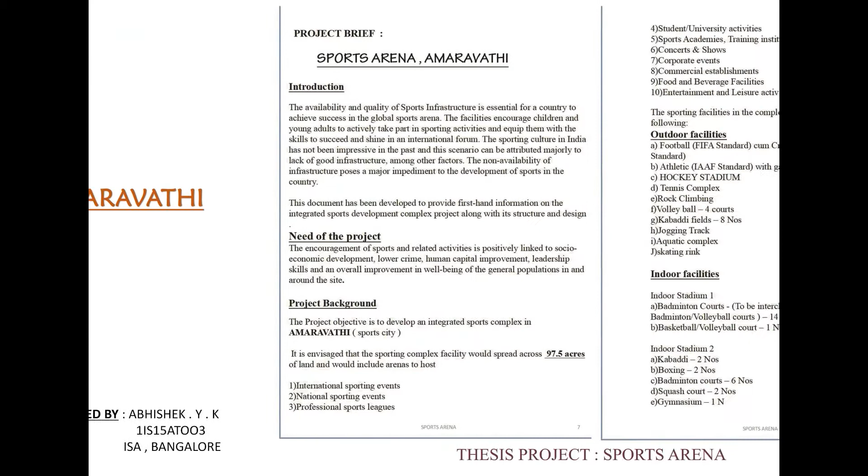Hello, this is Abhishek from Impact School of Architecture, presenting my thesis project on a sports arena proposed to be built in Amaravati, Andhra Pradesh. The availability and quality of sports infrastructure is essential for a country to achieve success in the global sports arena. Lack of proper infrastructure in sports, especially in South India, is a key reason to choose this project.

The need for this project stems from the fact that encouragement of sports is directly and positively linked to socio-economic growth, as well as overall improvement in well-being.

The objective of the project is to develop an integrated sports complex in Amaravati spanning around 98 acres. The sports arena is expected to host national and international level sports events with all outdoor and indoor facilities. In this sports arena, I will be concentrating on the detailed design of an international level cricket stadium and hockey stadium.

Coming to the site analysis, according to the detailed master plan of Amaravati, the city is divided into 9 different cities: Sports City, Government City, Finance City, Tourism City, Health City, Knowledge City, Electronic City, Justice City, and Media City. Our project is proposed on the land designated for Sports City, 98 acres, next to the Government City.

The project site falls under the sports zone and mixed use zone. The allowable FAR is 2.55, and the project site is surrounded by villages known as Borupalem, Abbarajupalem, and Rayapudi.

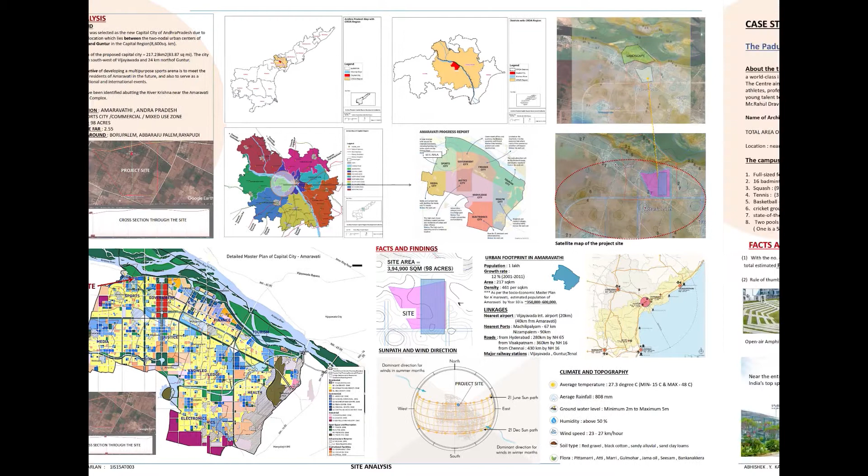This slide is about the case study on Padukone Dravid Sports Center, designed by Space Matrix Architects, located in Yelahanka, Bangalore, spread over 15 lush acres. This case study was very helpful in knowing how to calculate footfall and in understanding active and passive spaces.

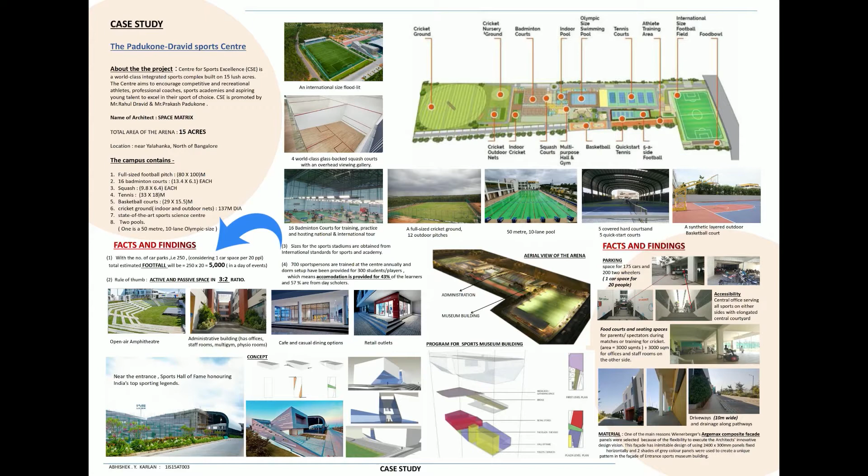The complex basically has 5 different zones: the outer fields, indoor courts, museum building, administration, and shops and canteens. There have been a lot of facts and findings about accessibility, vehicular and pedestrian movement, and parking based on the footfall, which is mentioned in this slide.

Literature study was done on the International Sports Complex at Saily. This sports complex is spread over 27 acres with a spectator capacity of 42,000. This activity mapping shows various sports events being practiced in different parts of the campus. You can see here how pedestrian, player, and vehicular movements have been segregated.

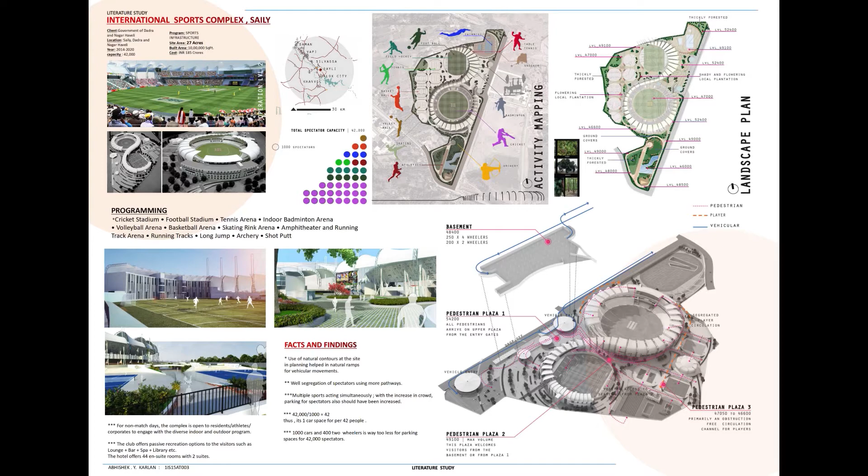The landscape plan gives us an idea of active and passive spaces in the ratio of 3:2 according to the rule of thumb. From the facts and findings, I learned that they have well managed the natural contours in planning, which helped in creating natural ramps for vehicular movement.

This slide is all about the research and area programming. Footfall is one of the major aspects to be considered in order to design an integrated sports arena, and finding the footfall was really a tough task for me in this project. Finally, the footfall calculation was done based on assessment of sports facilities in India, regional demand for sports facilities, and current sports infrastructure in the surrounding area.

The detailed explanation for each aspect has been provided here.

So as I got the footfall, it was easy for me to calculate the parking spaces and finally came to the conclusion for the total area required for the project. So for 99,500 footfall, the estimated area required for the project is 98 acres, including 4,975 car spaces.

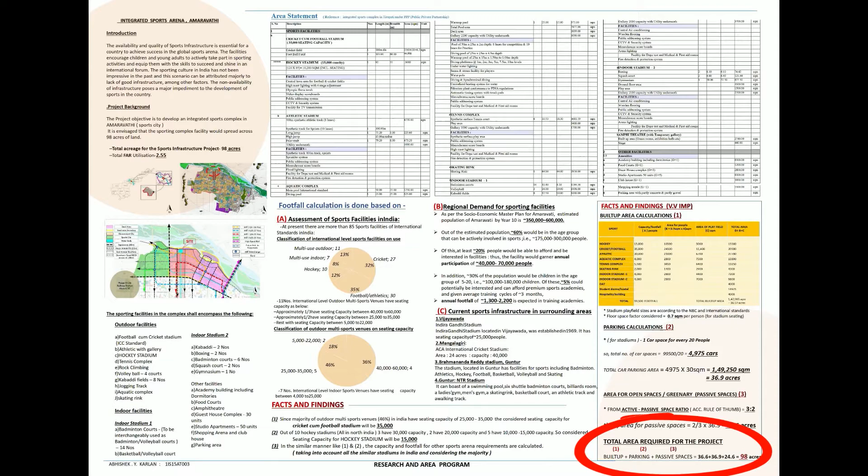Here I start with the master planning of the sports arena. Amaravati is bound by natural features, mainly Krishna River and its rivulets. The concept for master planning is inspired from the formation of rivulets, and this is how the design process for master planning started, keeping this concept in mind.

Initially, there was an idea of having water bodies throughout the sports arena in the form of rivulets. But later, the water bodies were reduced in order to minimize the maintenance and keep it grounded in reality.

The zoning for the master plan is worked out on the basis of indoor stadiums, outdoor stadiums, practice fields and practice courts, parking lots and landscape.

We have two main entrances, one in the north and the other in the northeast. There is a separate entry, back entry and exits provided for the cricket stadium, as it has the highest ingress and egress, and the footfall needs to be segregated.

As we enter from the main entrances, we are dropped off in front of the entrance building that houses the reception and displays meant to encourage sports and showcase achievements. It is more like a viewing gallery towards hockey, cricket and other indoor stadiums.

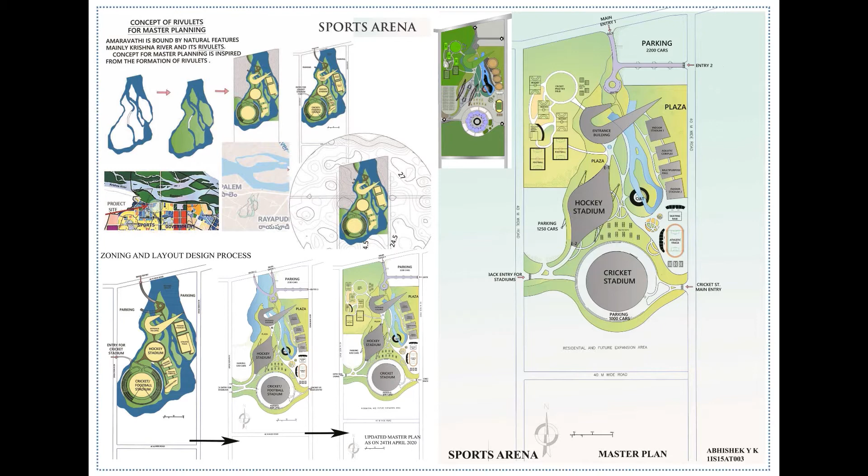There are three main parking points: one in the northeast with 2,200 car spaces, a second one in the west next to the hockey stadium with 1,250 car spaces, and a third one around the cricket stadium.

Coming to the international level cricket stadium, this stadium was inspired from a flower called blue chrysanthemum. This flower symbolizes nobility and stands for getting together. The pattern of petals in the chrysanthemum, bowing inwards, and their arrangement is the key inspiring element for the design.

Each petal-like external shield unit acts as a facade as well as a cover for the seating, making it a magnificent circular structure. This cricket stadium design was also submitted for a national level competition, INSDAG - Institute for Steel Development and Growth - and was selected as one of the finalists in Kolkata.

Let me first show you the walkthrough of the cricket stadium so that it would be easy to understand the plans.

You have 8 entry gates and parking lots on either side. You enter the stadium at the +1 level and reach seating through the vomitories.

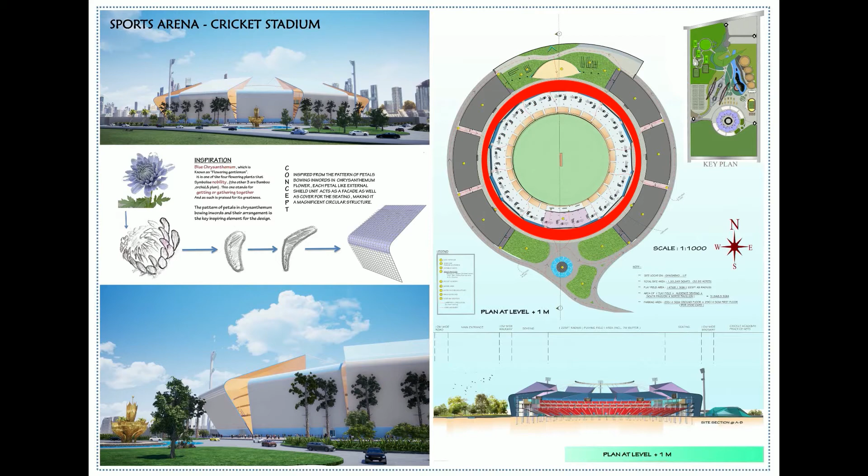In the south pavilion, you have the reception, player facilities, player rooms, cafe, bar, and first aid area. So you have the central 225 feet radius playing field, then comes the seating, then the spectator walkways, and then the parking and exit gates.

The south pavilion also has a viewing gallery and special VIP seating with the selection committee.

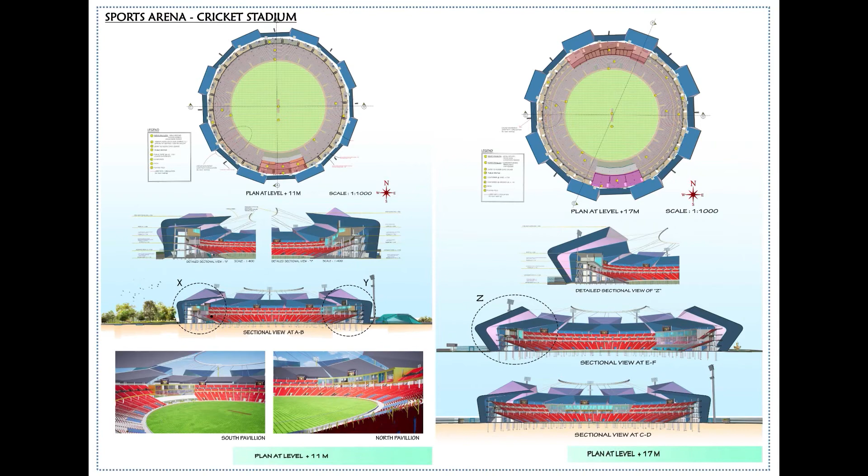Now I come to the most interesting part of this design, the USP of this design: the use of Vibrowind technology on facades to make the stadium energy efficient. Vibrowind technology is a turbine-free technology to harvest wind into electricity.

This project proposes to put a panel of about 25 oscillators per square meter, estimated to produce 54 watts per meter square in an hour.

The main advantage of this technology compared to solar panels is that it works without sun and even at 2 meters per second, which is what makes it unique.

A stadium on average consumes 20 lakh to 30 lakh units of electricity per year. For the stadium designed, installing this technique on a facade area of 25,000 square meters would produce 15 lakh to 30 lakh units per year.

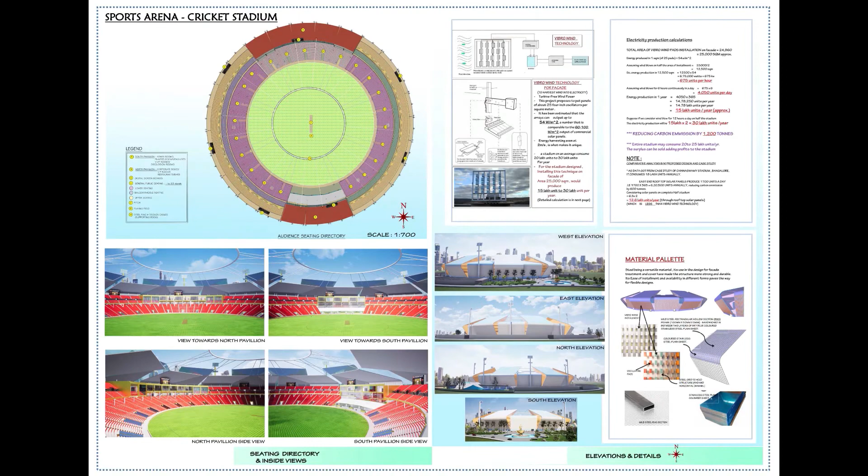If we observe each external shield unit, we see that a mild RHS frame, that is the rectangular hollow section frame, is sandwiched between two layers of steel plane sheet.

This is the end of the cricket stadium, and now we move on to the design of the semi-open hockey stadium. The initial idea arose from the local Amaravathi stupa with its huge dome. With thoughts of having a central hockey play field and seating, I felt it necessary to add some landscape within the stadium itself, and this is how it came out.

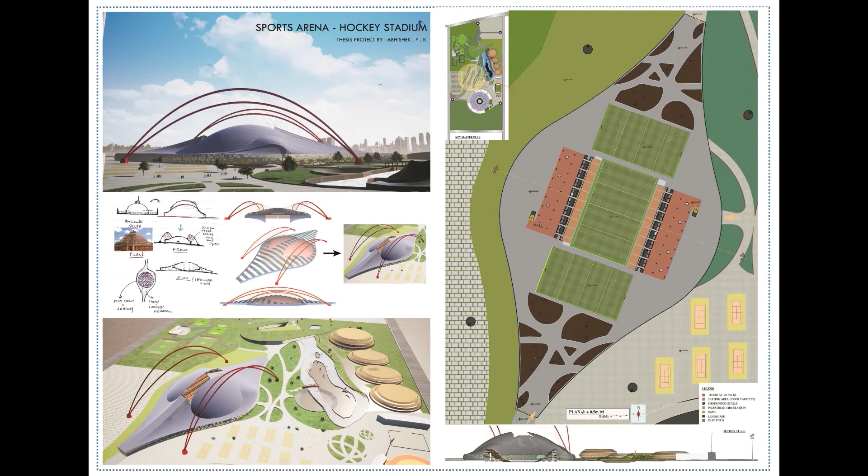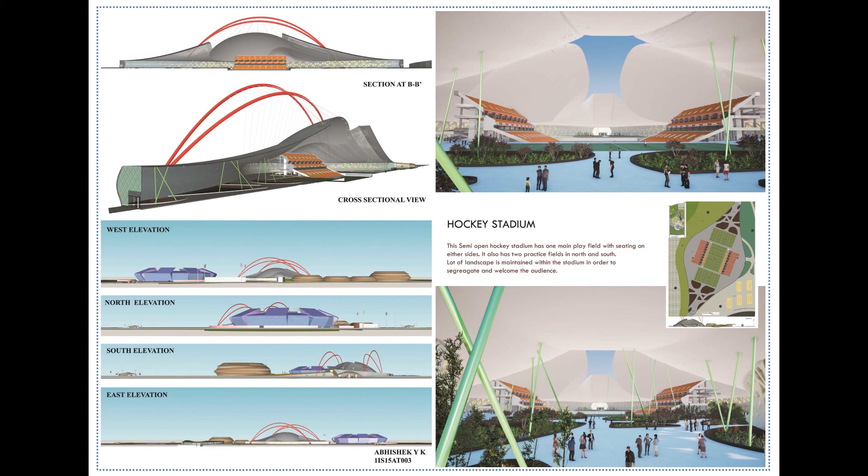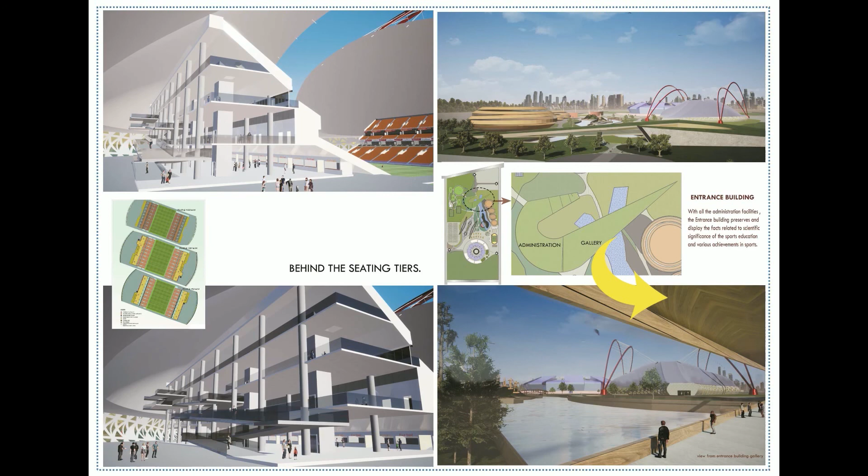So here I am ending my presentation with the views and skyline of Amaravati, and thank you for your active listening. Thank you.